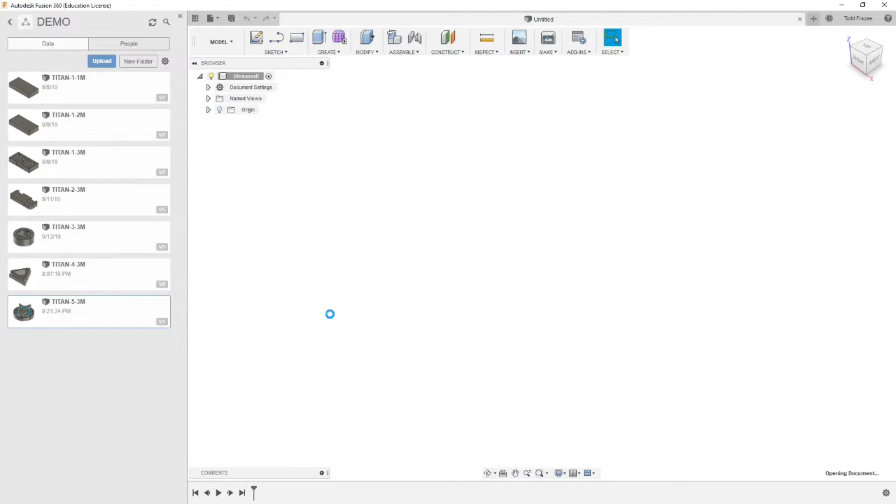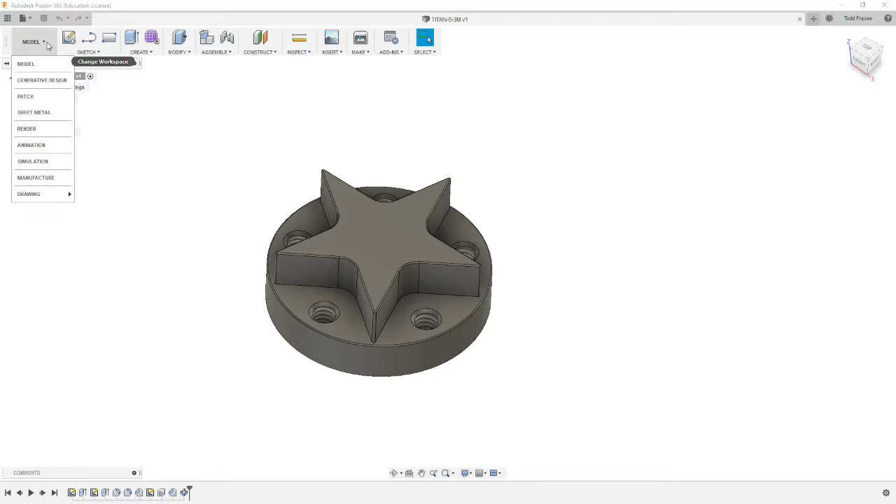So let's double click on that model to open it, and we're going to close the data panel so we get more space. And it's this star shape with a series of holes around it. Okay, so we're first going to switch to manufacture mode. And as usual, we're going to create a new setup.

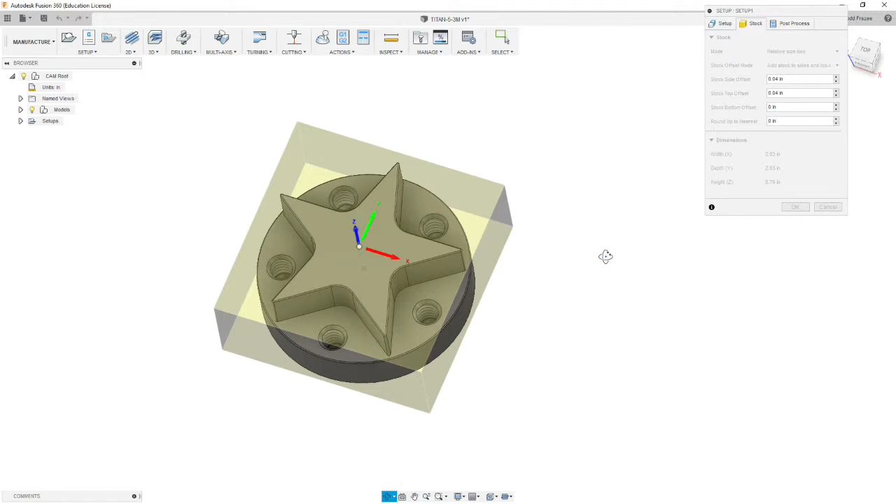We're going to have this setups highlighted. We're going to go setup, new setup, and we're going to set up our stock. Now this is probably the first project you've done where you set up stock on a circular part. So in this part, our overall diameter is 1.95. So we have 50 thousandths of extra material total.

So we're going to put 0.025 as our side offset, and we should have an X width of 2 inches by 2 inches, and we have 0.04 that we're going to move off the top, and we have an overall thickness that we're starting with of 1 inch. So we need to put that difference on the stock bottom offset. So that's going to be 0.21. So it should give us a 2 inch by 2 inch by 1 inch piece of material.

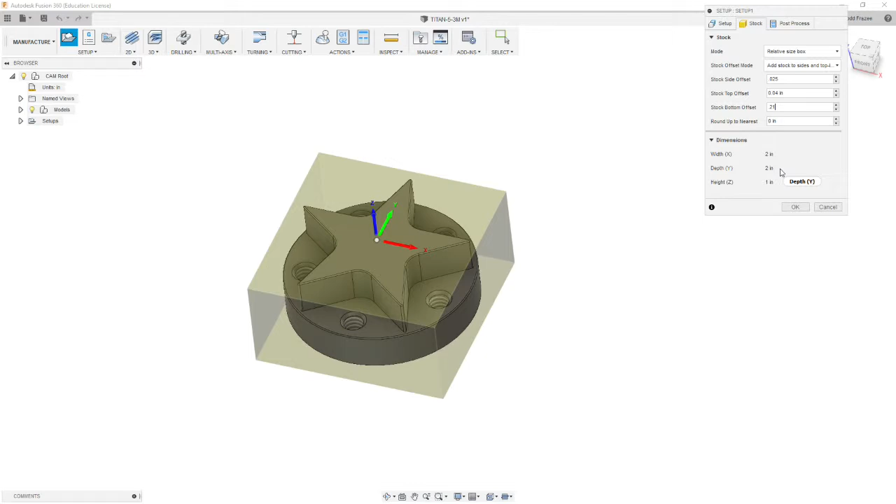Now the direction that is saw cut, you're going to want to have facing so that it's not the faces you clamp against. 2 of the faces will be mill cold rolled from the aluminum mill, and then the other 2 faces that have the saw cuts might vary in length, so it might be a little more than 2 inches.

Okay, so now we're going to go to setup. At this point, if your x-axis and y is as shown here, we're just going to go and pick a stock box point of this corner for your first operation. Okay, and you may need to flip it, and if you have trouble with that, you cycle through these different options here. Okay, since we've done that several times, I'm just going to move on to the next tab, which is our post-process tab.

And we're going to call this 1041. Our program comment is going to be operation 1 with a work coordinate system of 1. Okay, we'll select OK, and our first setup is created there.

Okay, now we're going to do our first operation, and as usual, it's going to be a face mill. So we're going to come in here and face this thing, and we're going to select from our Titan building blocks library tool 1, which is our 3-inch face mill. We're going to go 4,000 RPM. And I'm going to start having you go a little bit faster. So we're going to go 40 inches a minute here, 40 inches a minute for all of these.

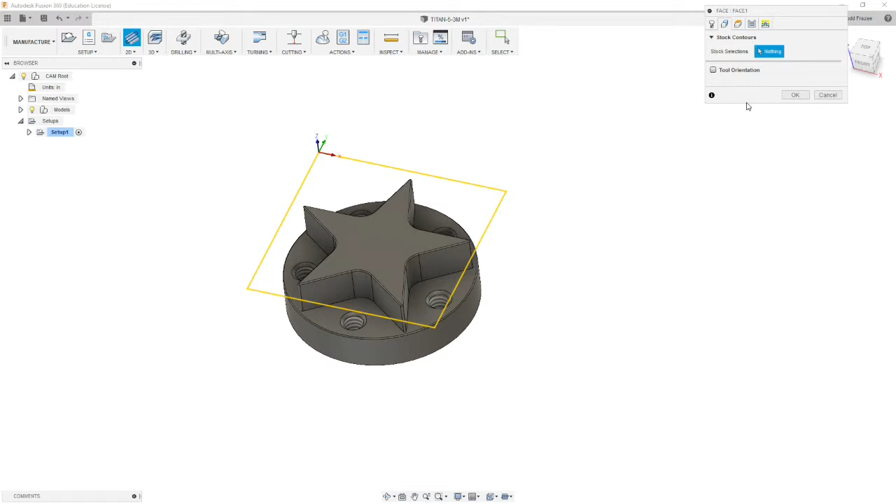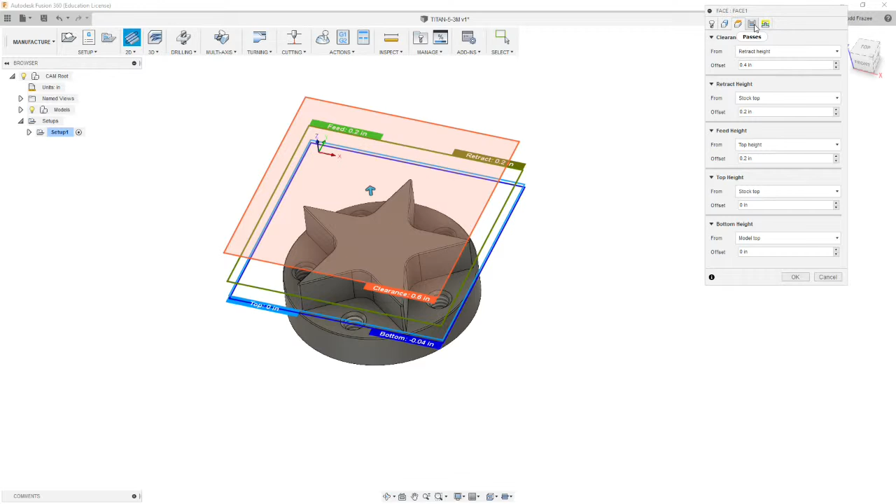Okay, we're going to go on to the next tab, which is geometry. There's really nothing to select here. We're going to go to our heights, default, default, default, default, default. So we should be cutting off 40 thousandths worth of the material, which is between the cyan plane and the dark blue plane. Okay, we're going to move on to passes. 4 thousandths tolerance is fine.

Pass direction. We're actually going to go 90 on this, and our pass extension is going to be 1.6. And we're going to leave the stock offset alone and step over alone. And what we want to do is, since this is doing one single cut, we want the direction of cut to go against the fixed jaw of the vise, especially with this small of a piece, if we go from side to side.

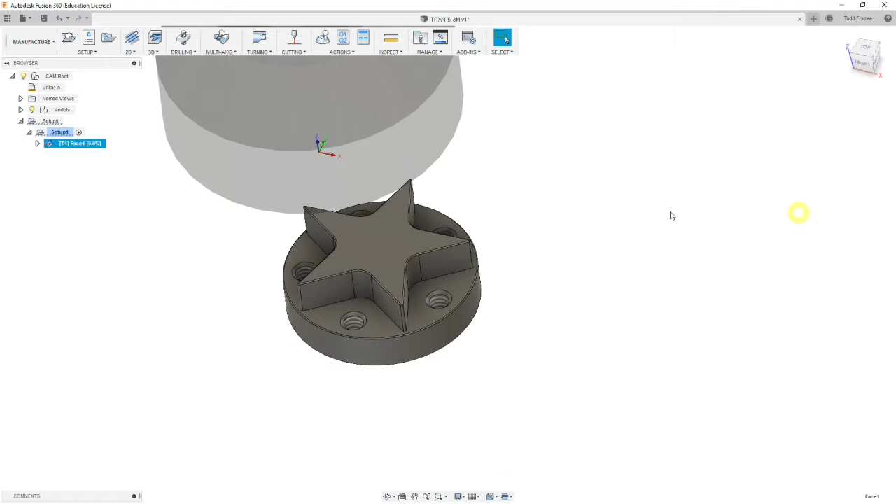So if we set this at 90, I believe it will go in the y-axis, and ideally we want it to move the table towards the operator, but the cut will go away from the operator, pushing it against the fixed jaw. I'm going to go ahead and hit OK and see if those parameters work. Okay, they did not. It's coming down and coming out.

So the way you change that, we're going to go to Edit, and we're back at our Passes tab. You switch this box that says from the other side, and what it'll do is it'll come from the opposite side of the part and reverse the cut.

Okay, so we don't want multiple depths. We don't want stock to leave. And then we're going to move on to the next tab, which is linking. We're going to leave all these first ones at default. Lead in, we're not going to have a vertical radius, so we're going to set that at 0. And we're going to leave these others at default.

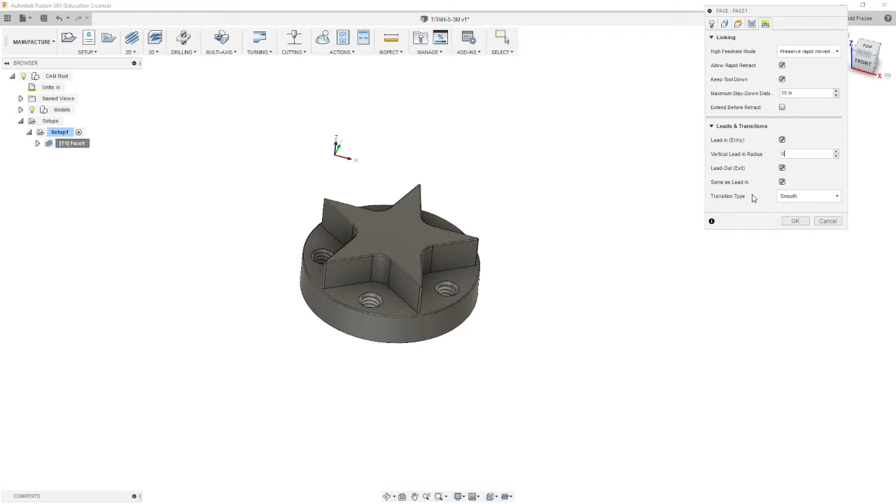And select OK. So now the face mill comes straight down, and then it feeds towards the fixed jaw of the vise, because we selected that box on the prior tabs. Okay, we're done with that. We're going to move on, and we're going to do a 2D adaptive clearing on this.

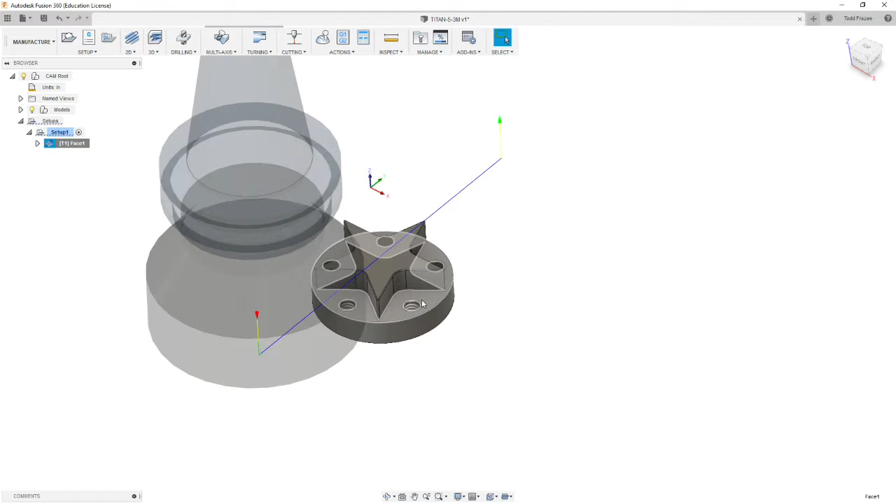Alright, so for our 2D adaptive clearing, we're going to use the 1/2 inch end mill. And it's probably not going to be able to cut these radiuses here. So we're going to be coming back in with a finish cutter, which is the 3/8, to clean all that up anyway. So we're going to go 2D, adaptive clearing. You're going to select the Titan library, 1/2 inch end mill.

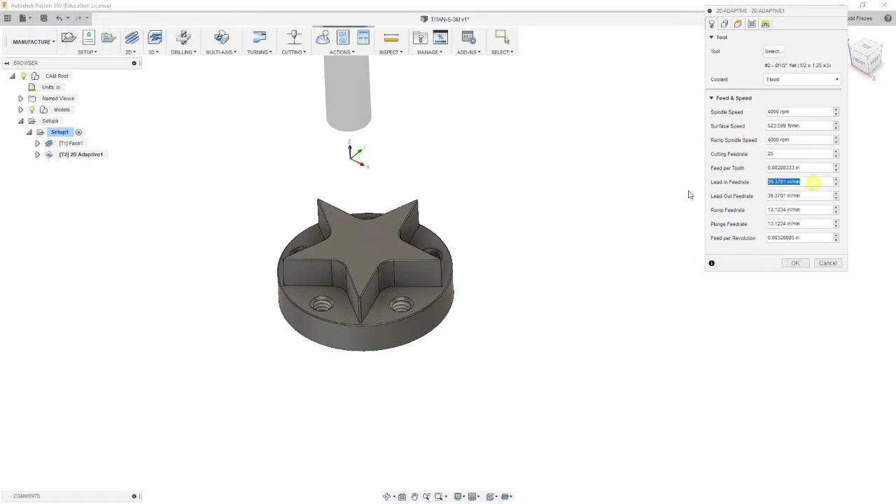Okay, with a 1/2 inch end mill, we're going to go 4,000 RPM. And we're going to go to cutting feed rate of 25 inches a minute, 25 inches a minute, 25 inches a minute, 13 and 13. Okay. And we're going to go to geometry. Our pocket selections are going to be here and here.

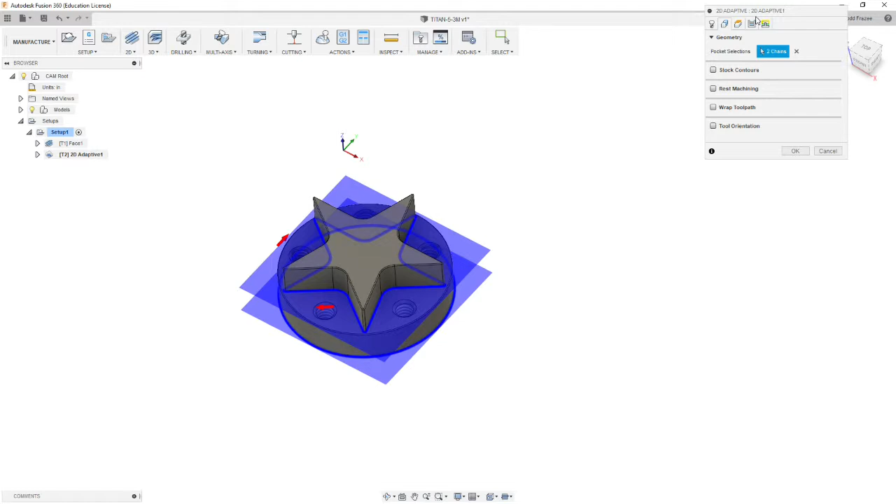And our stock contours, we're just going to leave that at default. It's what the box of the stock is, the 2 inch by 2 inch square. So we're going to move on to heights. We're going to leave all that at default. We're going to change this to model top because we've already cleared off the top of the part. And our top height is also going to be at model top.

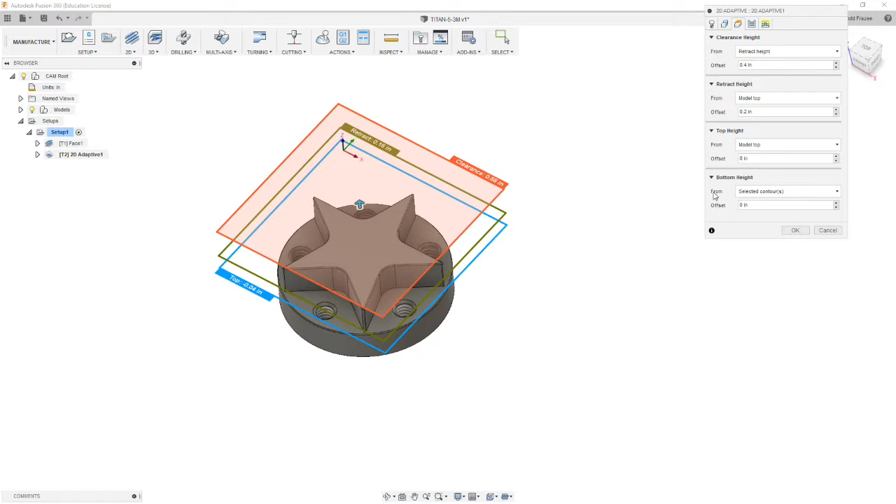Our bottom heights are going to be at selected contours, so it depends on which contour we selected. We're going to go to passes. Our tolerance at 4 thousandths is fine because this is a rough cut. Optimal load 0.2, we'll leave that alone. We want a minimum cutting radius of, that's fine, 0.05. It's going to cut as much as it can.

And we're going to climb cut, and we're going to do multiple depths. And our maximum step down is going to be 0.5. Okay. We're going to do order by depth. And we're going to leave 20 thousandths of stock to be removed by the next cutter. We're going to select smoothing and leave 4 tenths tolerance.

The next tab, we're going to leave all these at default, including the non-engagement feed rate. So when it doesn't pull up to the rapid plane, it'll go 25 inches a minute. We're going to do horizontal lead-in radius of 0.1. I don't think we need a vertical lead-in radius.

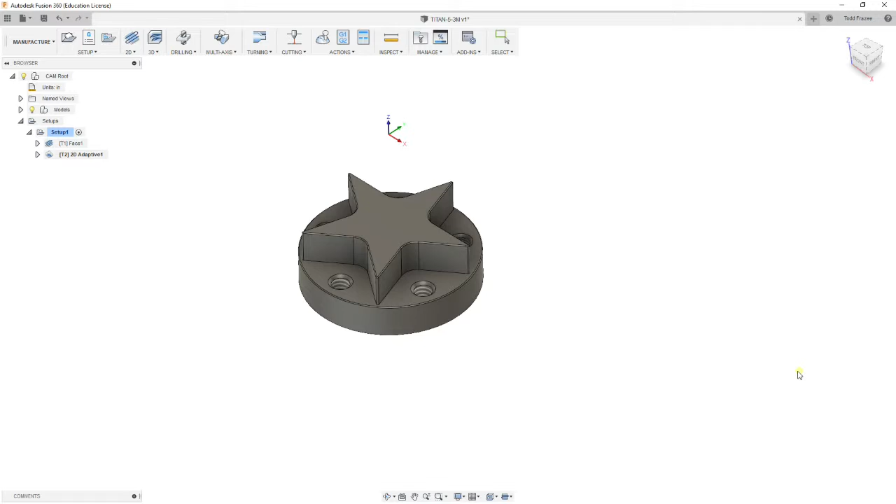Ramp type's going to be helix, 2 degrees. Ramp taper angle, leave it alone. Ramp clearance height, 0.1. Helical ramp diameter, let's set this at 0.3, a little bit smaller. And we don't worry about entry positions, at least at the moment. Let's hit OK and see what we get.

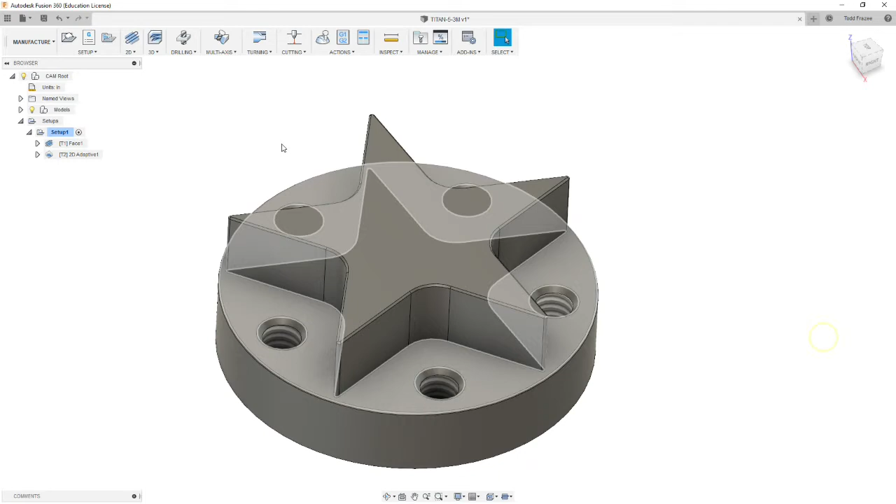So we get this kind of, looks kind of crazy, but yeah, it roughs here, and does 2 rough cuts for the cylinder. But it pretty much roughed the star out pretty well. We're going to go 2D. No, we're going to go 2D contour.

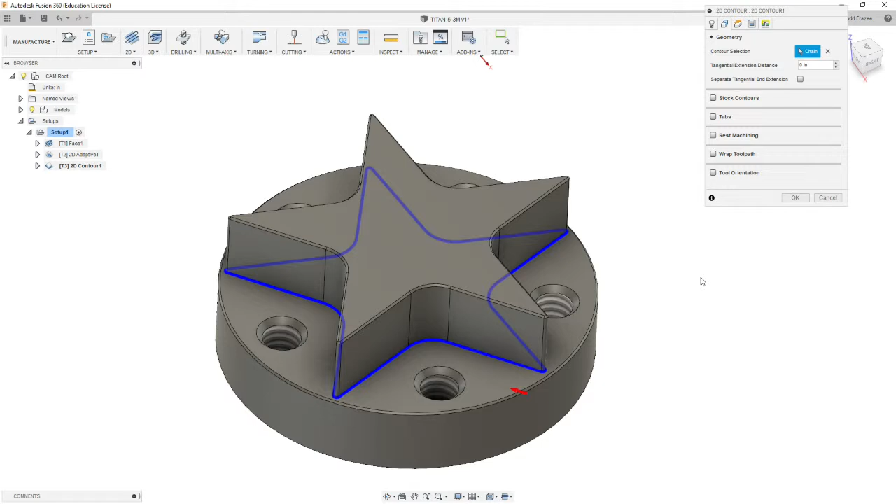We're going to select the 3/8 diameter tool. So that's tool number 3 in the Titan library. We're going to go 4,000 RPM. Again, 25 on all these feed rates, with half of that on the plunge. Okay, we're going to go to geometry, and we're going to select just the star. Make sure the arrow's on the outside.

We're going to go to heights, and we're going to go model top on retract height and model top on top height. Okay. And we're going to go to a depth of the contour we selected. Okay, so we have 4 tenths tolerance. It's fine. Left, we're climb cutting. We're going to switch from in computer to wear, and our compensation radius we're going to leave alone.

We're going to skip down here. Our finishing feed rate is going to stay at 25 inches a minute. We're going to come down here and select the rough passes. So our finishing step over box appears, and we're going to put 0.01 in that box. And so we're going to get 1 roughing pass on the sides. Our roughing pass maximum step over is going to be 0.2.

The reason for this being smaller is we don't have a lot of material to remove, but the distance between this arc and this circle is more than the diameter of our cutter. 4 thousandths smoothing deviation is fine for the roughing. We're going to do 2 step overs.

We're not going to do multiple step downs just because we've already cleared most of this material out of the way. We're going to go to smoothing and select that for our finish pass. Now we're going to move on to the linking tab.

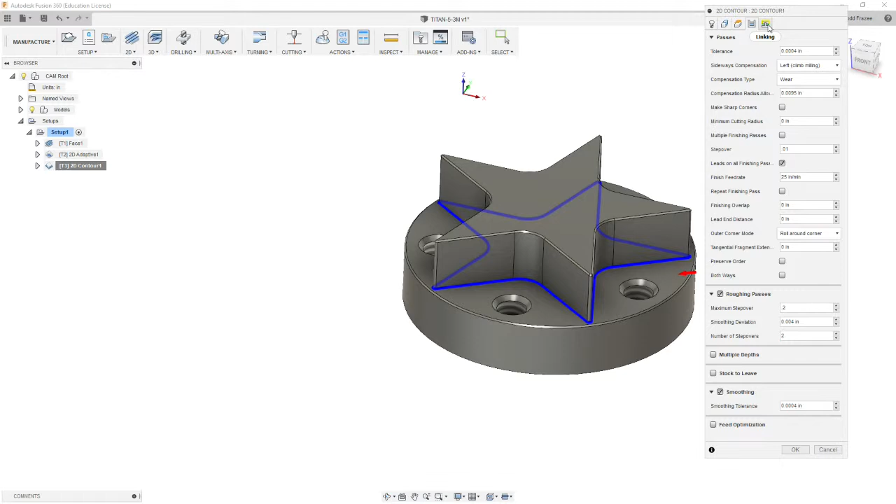Okay, so we have one rough cut, a second rough cut, and then a finish cut. It's going to finish the sides here. It's like a little clover leaf.

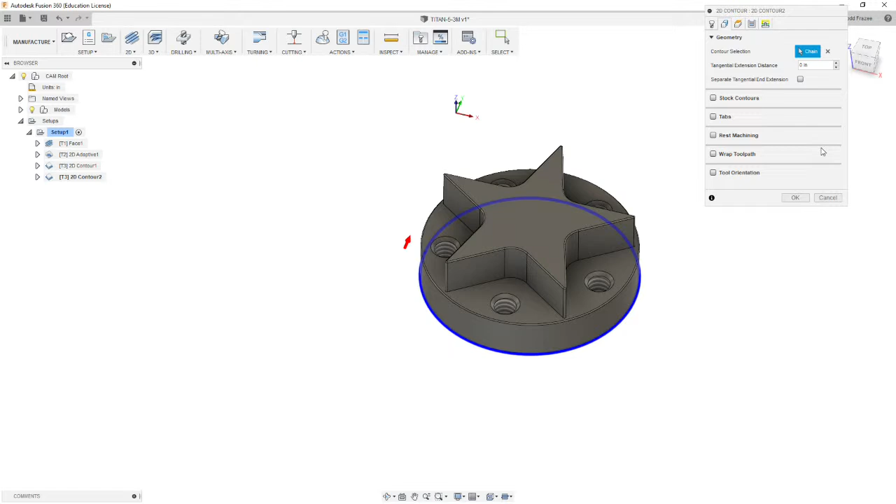Okay, now we're going to cut the bottom profile with the same end mill. So we're going to go to 2D. We're going to do 2D contour. We're going to select the bottom circle, and we've kept the same tool, so all the numbers will be the same on the tool tab. We've selected the circle on the bottom. We've checked that our arrow's on the correct side of the line. And then we're going to move on to heights. This is going to be model top.

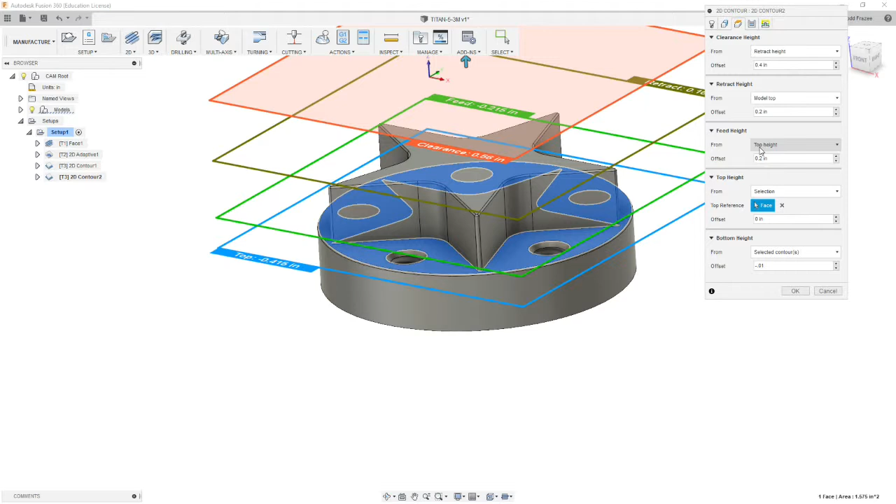Our top height, we're going to change that to selection. Our top height is actually going to be the top of that deck, because we've already machined all the way down. But that means our feed height needs to go higher. So our feed height is not going to be at the top height. Instead of top height, we're going to go to model top. And that way we make sure everything feeds down from model top to this plane.

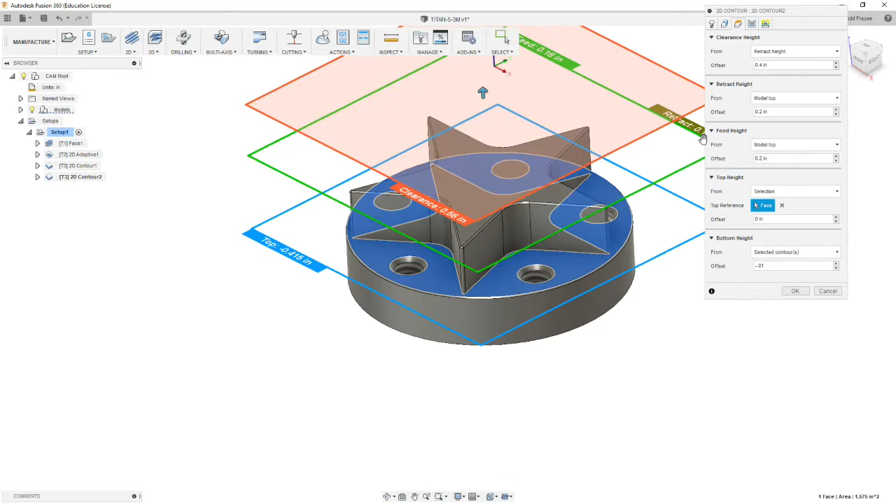Okay, we're going to move on to passes. We're going to leave it in computer. We're going to change that to wear. We're going to skip all these boxes until we get down to roughing passes. We're going to do a maximum step over of 0.3, and a smoothing deviation of 4 thousandths is fine with 1 step over. We're going to come back up to our finishing step over and put 0.01 there. That box appeared as soon as we checked the roughing passes. 25 inches a minute's fine.

Okay, we're going to do multiple depths. We're going to do a maximum depth of 0.25, and one finishing step down, and that finishing step down is going to be 0.01. It's a long wall. We're going to finish only at final depth, and we're going to use even step downs. I'm going to minimize roughing passes so we can see the rest of this. There aren't any islands, so we'll deselect that. And then we're going to hide multiple depths so that we can select smoothing, 4/10.

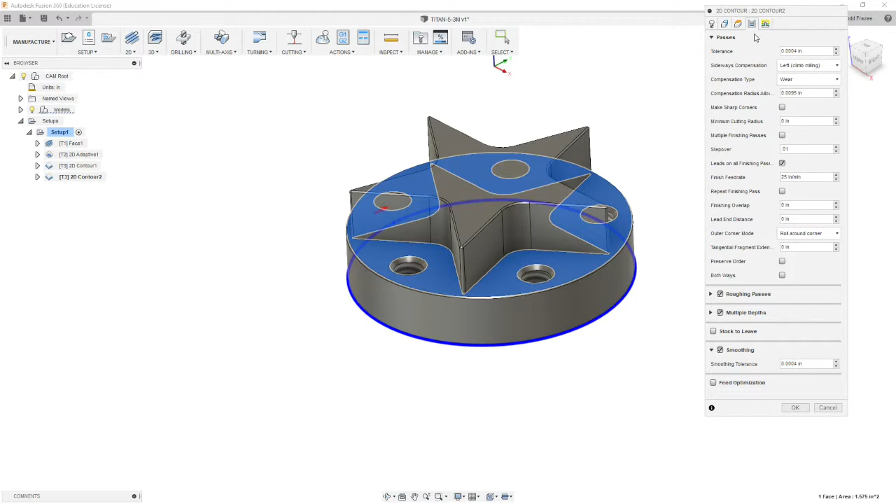Moving on to the linking tab. Lead-in's fine. Horizontal lead-in radius we're going to set at 0.1. 0.1 for our linear lead-in distance. 90 degrees is fine. We're not going to do a vertical lead-in on this, so we're going to set that at 0. Lead-in and lead-out's the same. We're not going to ramp in. We are going to put an entry position in line with this hole here. So this will be our entry position. We're going to hit OK.

Alright, so we come in, we arc in, we go around two rough cuts at two different heights and then a finish cut. Alright, moving on. We're going to do all our chamfering and then we'll spot drill. So we'll go to 2D chamfer, and we're going to do the star separately from this circle.

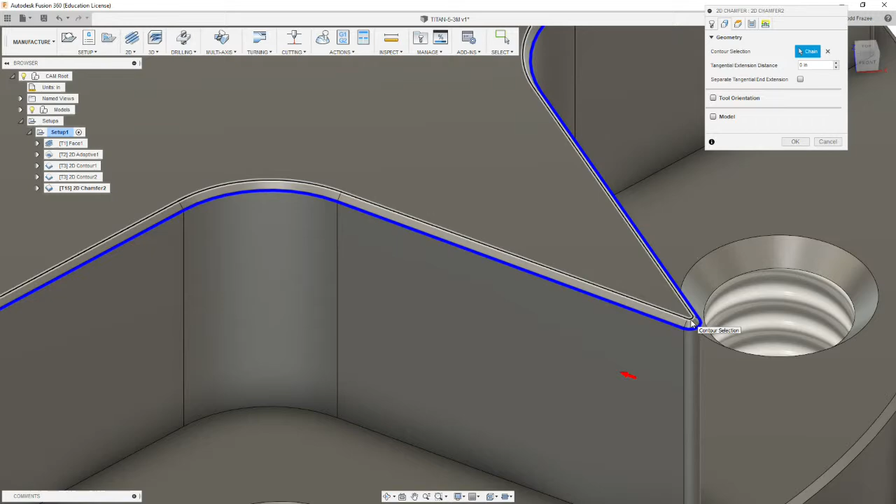So we've got to select our tool, which is going to be our 1/4 inch chamfer mill, tool number 15. Okay, 4,000 RPM, 20 inches a minute, 10 and 10 for ramp and plunge rate. Pretty much half. We go to geometry. We're going to select the bottom profile here. The reason we're doing that is we want this round to come out correctly. If we pick the top one, it may not, especially if the top ends up being sharp. Our arrow's on the correct side of the star.

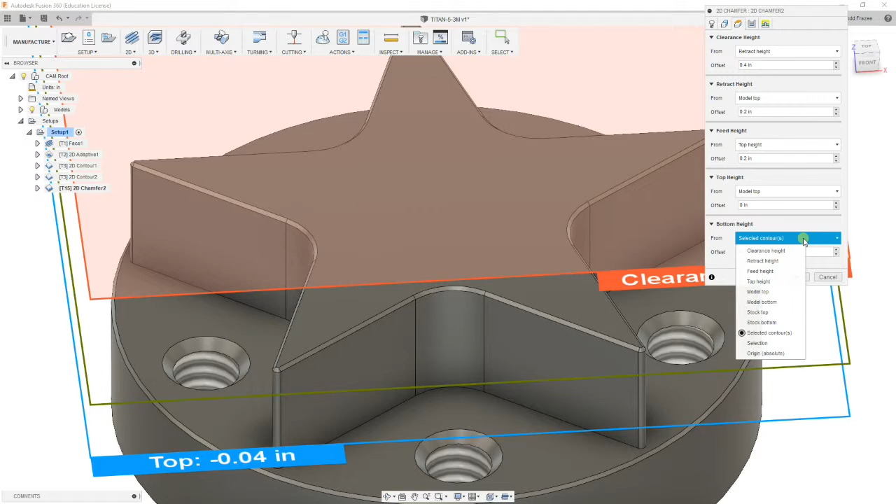We're going to go to our heights. It's going to be model top for retract height. Our top height is going to be model top. And our bottom height is actually going to be selected contour. And then we're going to go to our passes tab. Our compensation is going to switch to wear. We're going to leave these others at default. Our chamfer width is 0.01, it's a 10 thousandths chamfer. And our chamfer offset we're going to leave at default, which is 0.04. We're not going to put a chamfer clearance, put 0. We're going to select smoothing, 4/10 tolerance.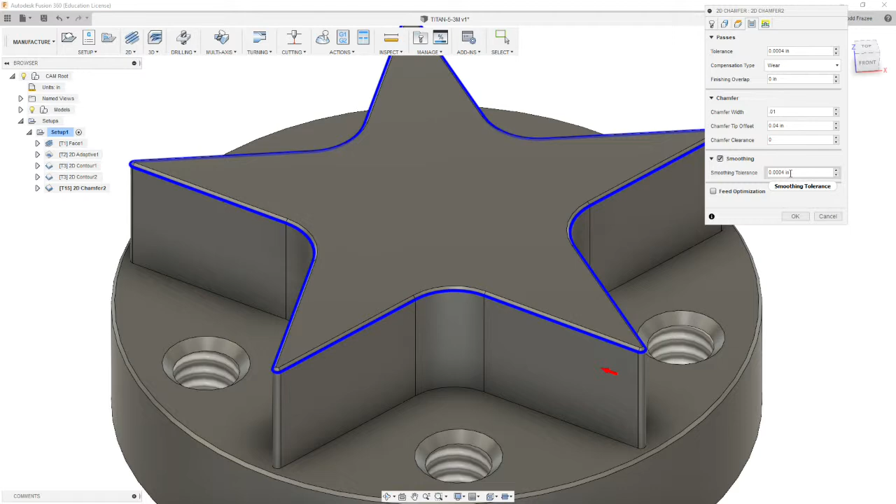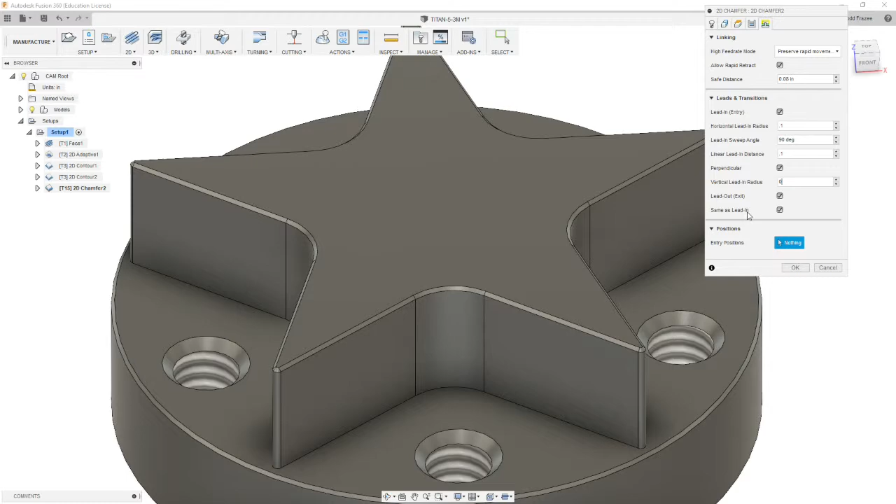Now we go to the linking tab, leave this all at default. We're going to have a horizontal lead-in radius of 0.1. 90 degrees is fine. Our linear lead-in distance is going to be the same, 0.1. It's going to come in perpendicular, and we're not going to put in a vertical lead-in. Lead-in and lead-out are going to be the same. We're going to select OK. And we have our first chamfer mill.

So to do the chamfer on the circle, we have to be careful because with the chamfer mill, we don't want the shank to run into these edges of the stars. We're going to right click on here and duplicate the chamfer mill that we used for the top. We're going to need to change quite a few parameters.

First thing we want to do is we need to find out how much room we have here for our chamfer mill to overhang without rubbing against the star. So we're going to go up to inspect and we're going to measure the distance between that radius and this edge here. And the distance is 0.024, so we have 24 thousandths, which isn't a whole lot.

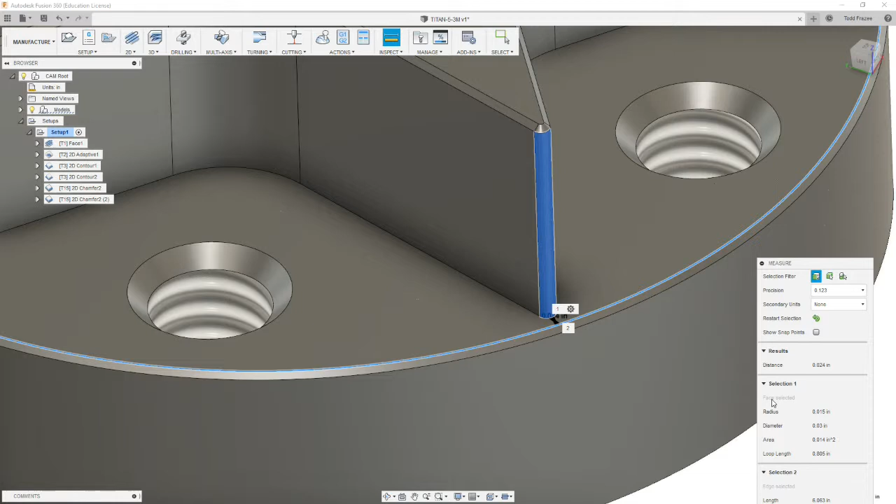So we need to make sure the chamfer mill is cutting on its outside edge, leaving enough distance to just barely clear this chamfer and not rub this feature. So we're going to close that, and we're going to edit this toolpath. So our RPMs and stuff are fine. That's the same as the last routine we did. We're going to go to geometry and we're going to clear the geometry selection because we're going to select something new. We're going to select this circle.

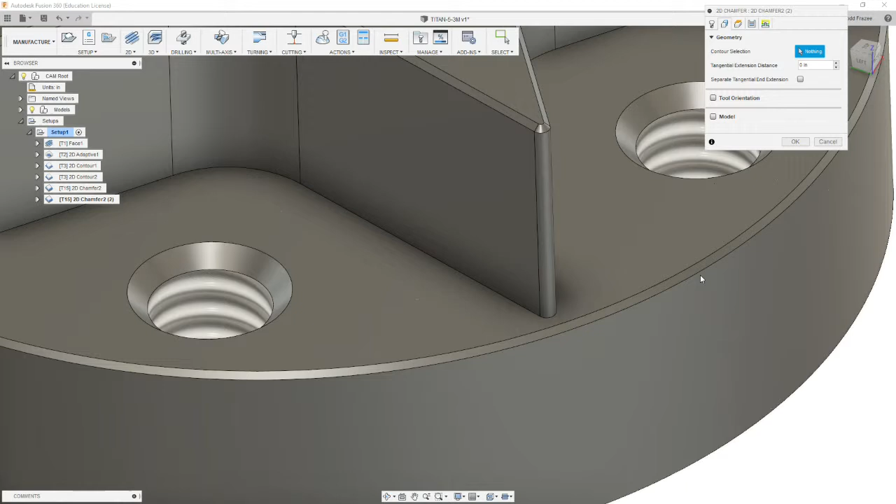And then we're going to move on to the heights tab. This is going to get a little tricky. So we're cutting down here, but we want to make sure that we're clear of our part when we're moving around. So our retract height is going to be based off model top. Our feed height is also going to be model top.

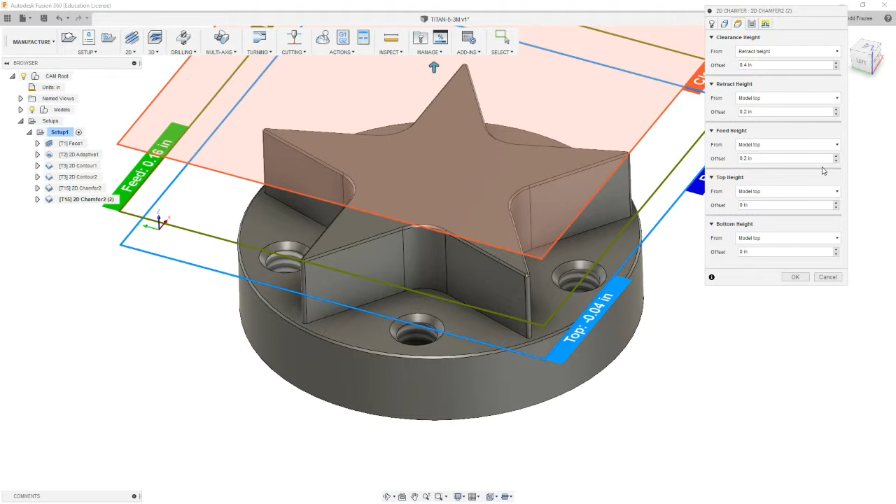Okay. Our top height of our cut is actually at this plane here. So we're going to do selection and we're going to select this plane here. Okay, so that's the top of our cut. The bottom height of our cut is going to be also that plane. So we're going to select that same plane and our arrows go away. What's going to happen is our chamfer is going to be made not based off these heights, but based off the overrides on the next tab.

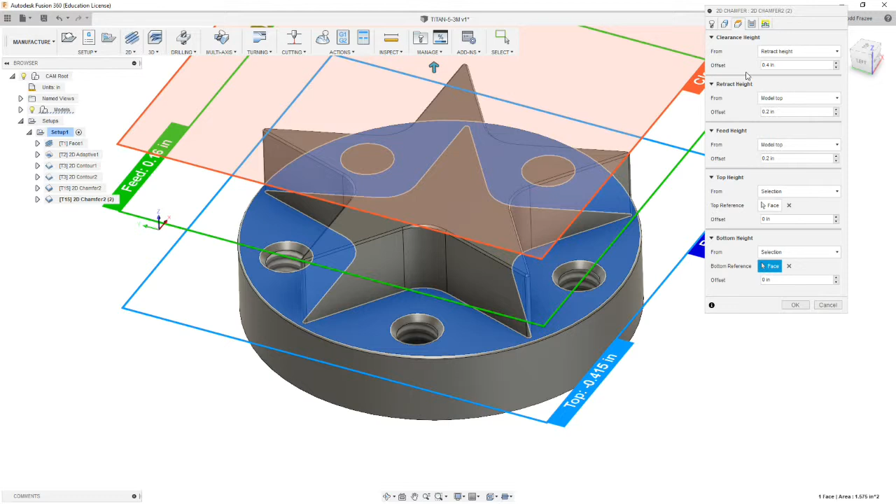So we're going to go to passes, and we have a 4/10 tolerance. Now, I discovered the first time I programmed this that even if the math factors out, the collision detection in Fusion, if you're using compensation, requires a lead-in. If you require the lead-in, its collision thinks it's going to hit these, even though the numbers we put in are mathematically correct. So we have to disable wear and just put it in computer. So we're not going to be able to compensate with the G41 line, but we can still adjust this cutter in Z to change the chamfer width.

Our chamfer width is 10 thousandths, and our chamfer offset needs to add up to 0.125, which is half the diameter of the cutter, minus this amount, plus an amount that will not hit this. So how we're going to calculate that is we're going to get our handy dandy calculator out, drag that onto the screen here. So if we are using a 1/4 inch chamfer mill, the diameter is 0.25. We're going to divide that by half, which gives us 0.125. We're going to subtract our chamfer width, 0.01. Okay, so that's the amount that would hang off the part if we just cut it with the very tip of the cutter.

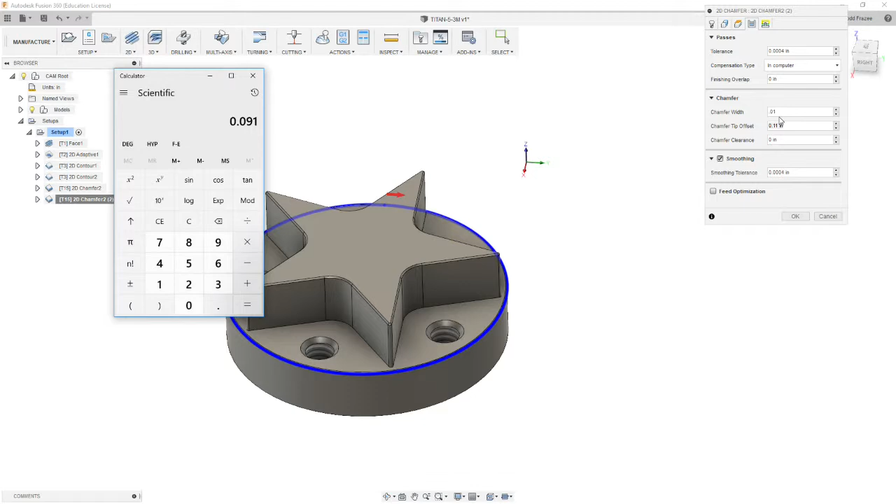These two values have to add up to less than the radius of the cutter. So as long as that's 0.125 or smaller total, we're good. So we're at 0.12, which leaves 5/1000ths of diameter overhang of our chamfer mill. We'll have smoothing selected, and then we go to the linking tab and we leave these at default, and our leads and transitions, we have those deselected.

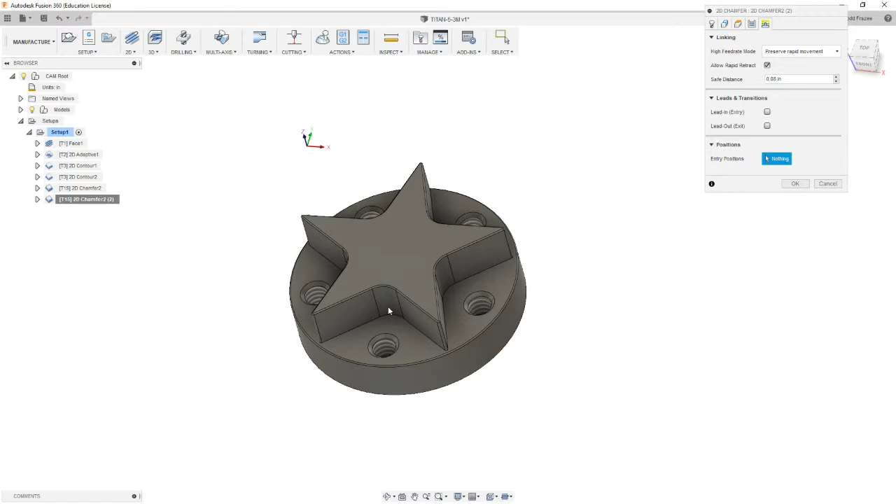Okay, and we're going to go choose an entry point of a spot in the front. So we got x-axis going this way. We're going to put it somewhat in line with this hole so the operator can see what's going on when this comes in. Okay, we're going to hit OK. And there we go.

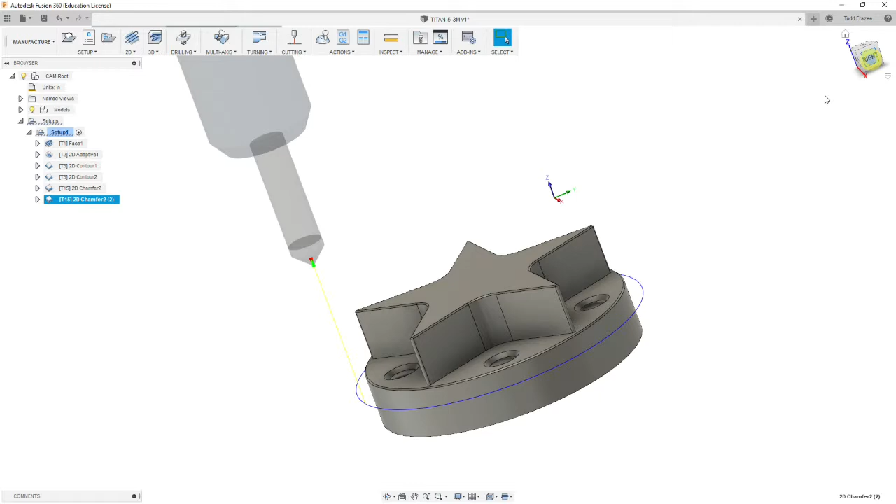Actually, let's look at this in the right view, so we can see the chamfer mill coming around when we simulate. So we're going to simulate just that one toolpath with, in this case, the stock turned off so we can see what's going on. So we got our chamfer mill coming around. Okay, so as it comes around, I'm going to pause the simulation.

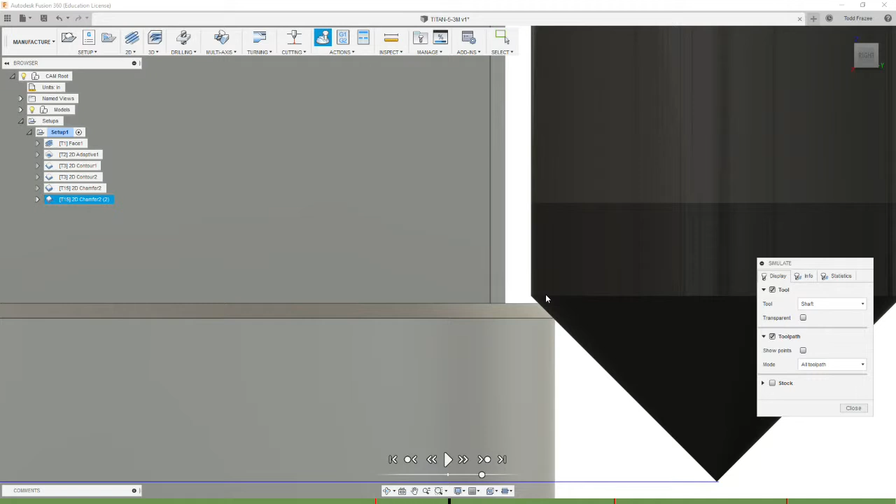And as you can see, we have clearance all the way around. So that's only about 5/1000ths. It's going to cut on the very top of the chamfer mill. So again, we've offset that by almost the entire diameter of the cutter, less about 5/1000ths.

Now we're going to move on to spot drilling these holes. And we need to measure the diameter of this chamfer. This chamfer diameter is 0.265. So we need to go to a depth that is half of that diameter to achieve that chamfer or countersink.

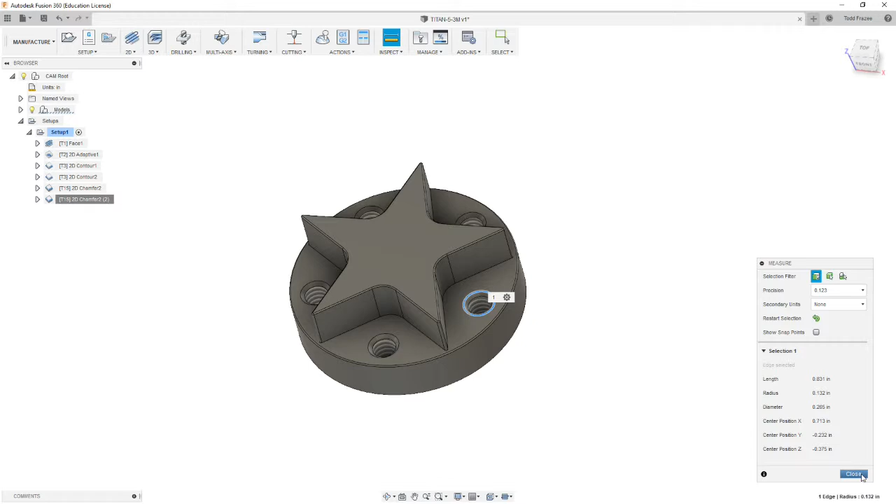So we're going to go to drilling. And we measured this at larger than 1/4 of an inch, so we have to go in with a larger chamfer mill. So we're going to go to select, and we're going to use the 3/8 chamfer mill. Okay, and it's 4,000 RPM, and we're still going to go 10, even though it's bigger in diameter.

And our geometry is going to be one of those faces of the countersink. And we're going to select all the same diameters. We're going to move on to heights. Our retract height is going to be based off model top. Our feed height is also going to be based off model top. And then our top height of our operation is going to be hole top, which is fine.

But our hole bottom is going to be based off hole top and a punched in value. So we're going to put in a negative offset of half of 0.265, which is 0.1325. And that has to be a negative number. Okay, so we get our chamfers, or our countersink, going in.

We're going to move on to cycles, and we're going to counterbore so that we can put in a 1 second dwell at the bottom. Okay, we're going to hit OK. And we got our routine. Now we're going to go on to drilling. Now the holes in this part are 1/4 holes. So we're going to go to drilling. We're going to do our pilot or tap drill size.

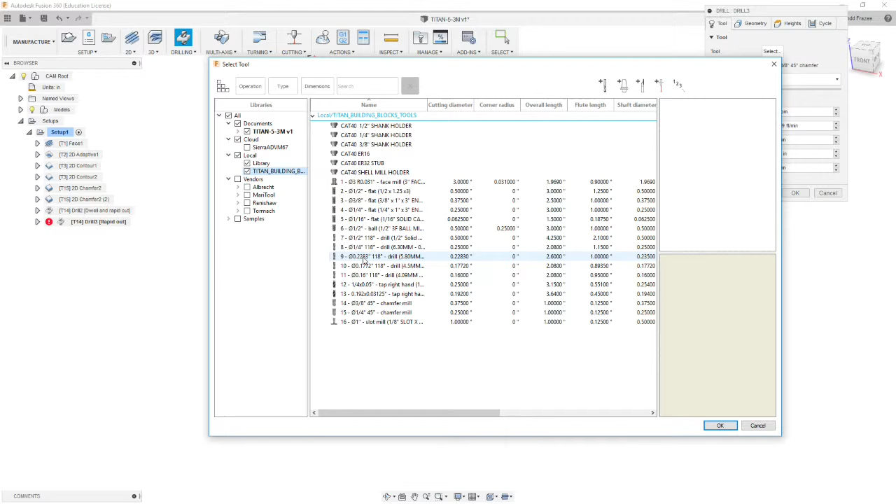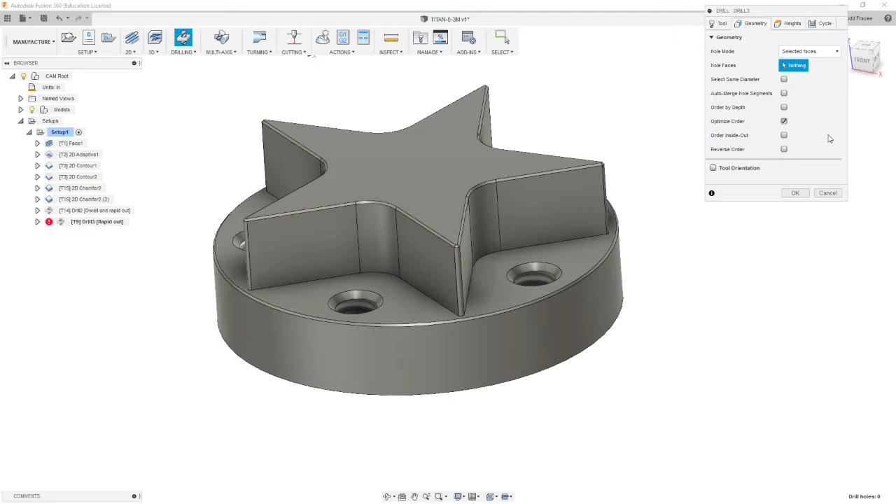We're going to go to Titan building blocks, and we're going to go to our 0.2283 drill. It's tool number 9. And we're going to go 4,000 RPMs, fine, 16 inches a minute's fine, and 16 inches a minute for retract. We're going to select our holes, go to geometry, and select one of the cylinders for our holes. And then we're going to select all the ones that are the same diameter.

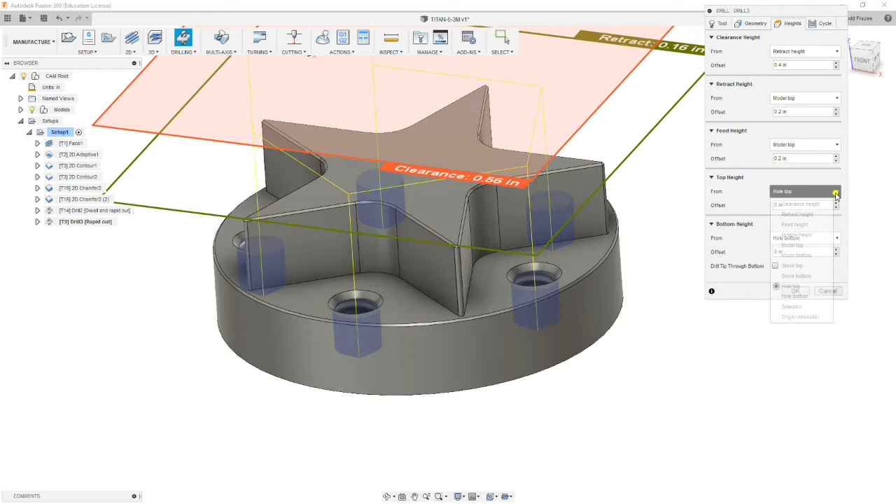And then we're going to go to heights. We're going to have model top for retract height and feed height. Our top height is going to be selection, because we're going to select this plane for the top of the hole. That accounts for the chamfer. Our bottom height is going to be the hole bottom, but we're going to have the drill bit go deeper, so it makes the hole at the full depth that the model is designed.

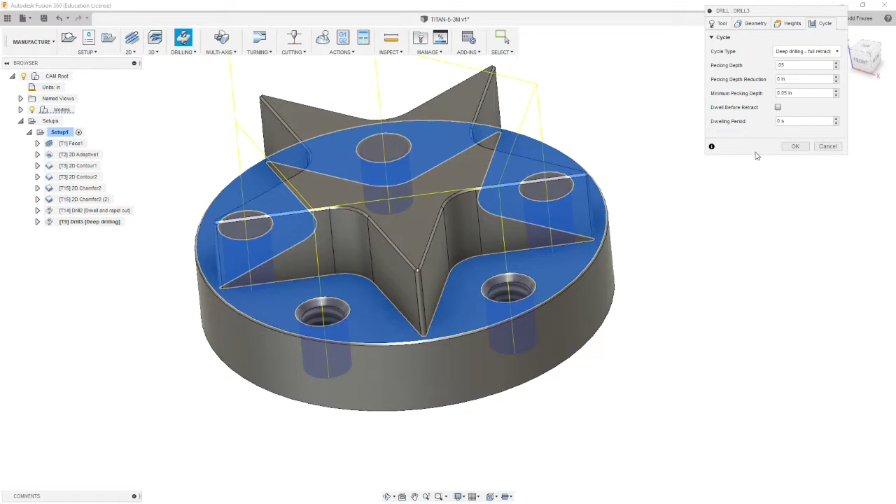We're going to go to cycle, and we're going to do a deep drilling cycle, or peck drill. Our peck depth, we're going to set that at 0.05, that's fine, and we're not going to deal with any of the other parameters. We're going to select OK, and we're done with our deep drilling. Okay, so we've done our drilling, and something I noticed about the design of this part, we're going to look at how deep our drill went.

So our drill bit has gone almost all the way through the part, and the way they've designed this, the threaded hole is shallow enough that we aren't going to get the full 275 thousandths of thread. There's just not enough clearance in a hole that is 300 thousandths deep to get a 1/4-20 thread all the way through there, unless we were to go all the way through the part. So we'll go ahead and program the tap, but we're going to leave the material between the two holes, and we're just going to live with the number of threads we have.

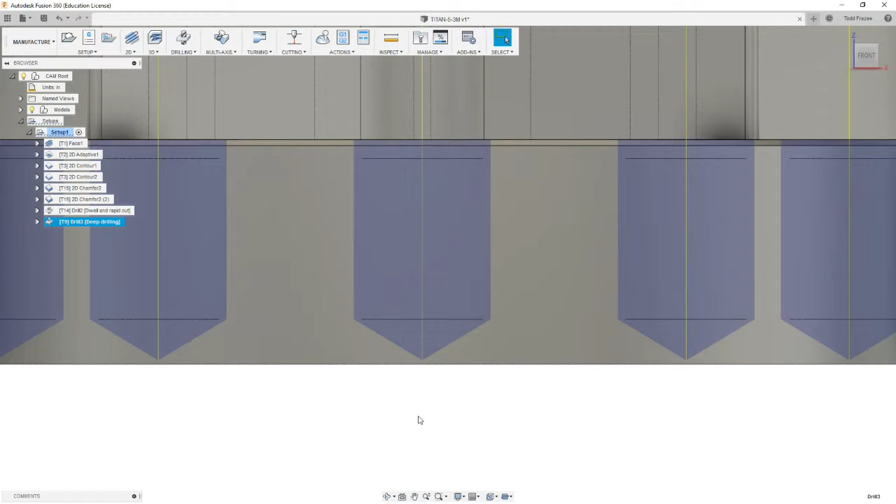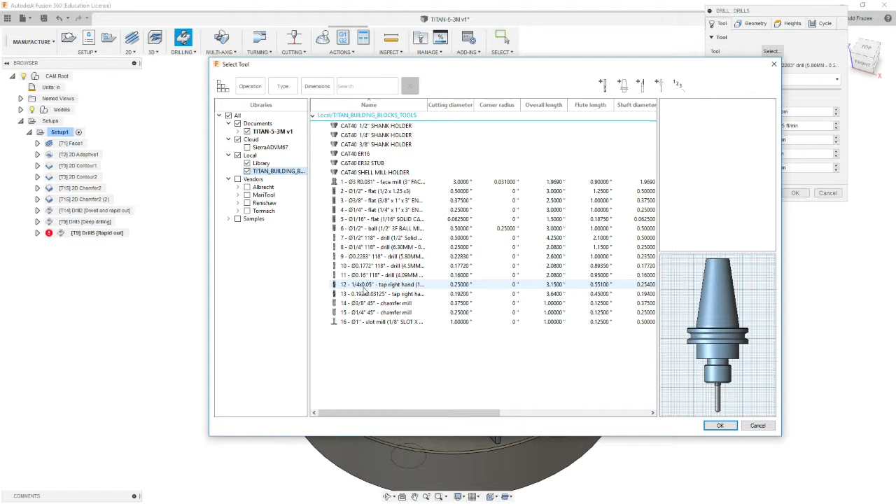Especially with a roll tap, they don't do well going all the way through material. They tend to work better in a blind hole. So we're going to go to drilling, and we're going to select our 1/4-20 tap from the Titan library, which it says here, tool number 12. Because it's a roll tap, we're going to leave that at 500 RPM. And on geometry, we're going to select one of our holes, and select all the same diameter so it gets the rest of them.

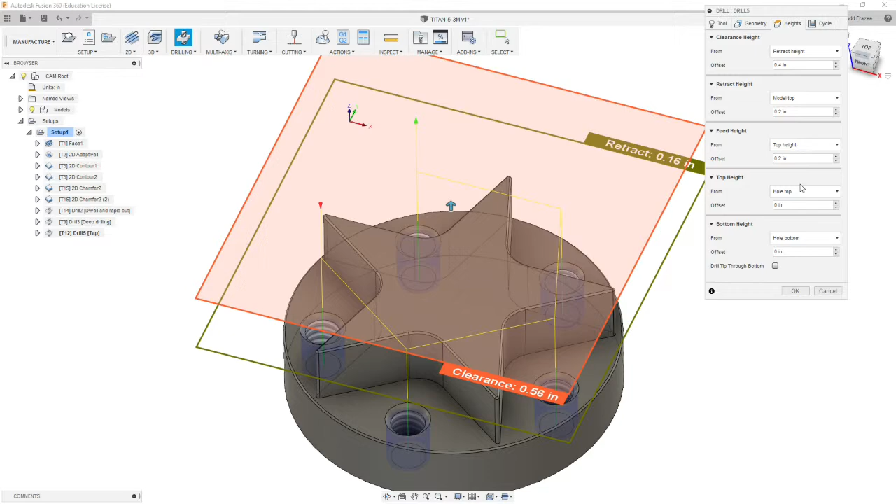And then we'll move on to heights, and our retract height is going to be at model top. Top height is selection. We're going to select that plane. The feed height needs to be at model top, and that way, with these two planes, all our rapid moves will be above the part. And then we're going to go from that same selected plane down negative 0.275. Alright, so after doing that, we're going to go to cycle, make sure we're on right hand tapping, select OK, and we should have our threads.

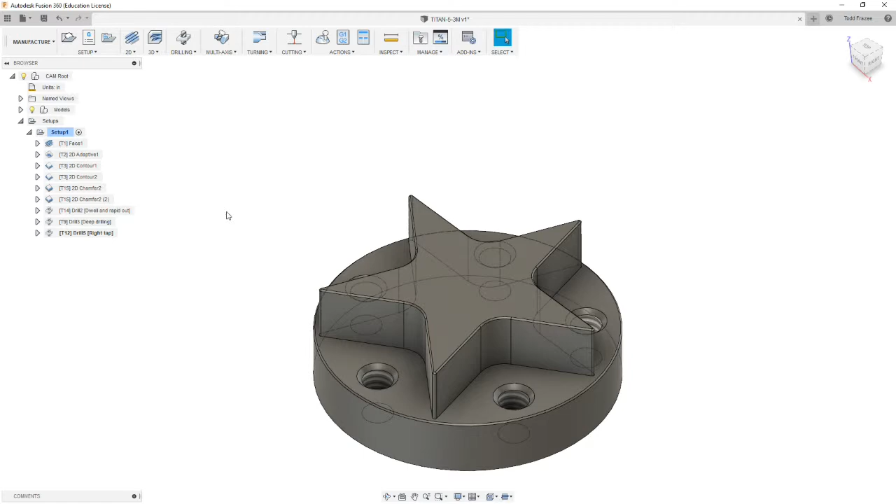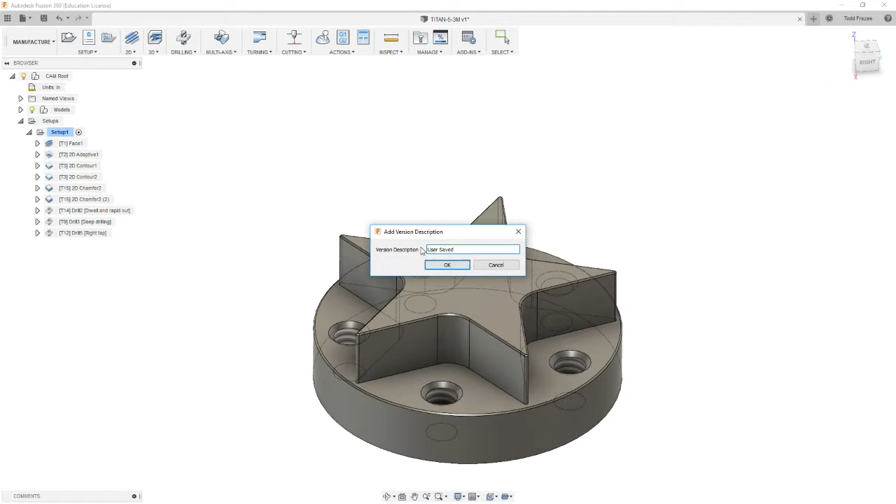Alright, so that is it for the majority of the part, and now is the time to do some engraving. So I'm going to show you how to flip between model and manufacture mode and update your model. So we want to save all this, make sure that we don't lose any of this. And you're going to go to model mode, and we're going to create a new sketch, and we're going to put it on this face.

And you can do what you like here. I'm going to sketch my initials, so I'm just going to use text, but you could just draw lines or a logo if you like. But to get full credit, you have to engrave something on there. So I'm going to use text. I'm going to place my text here. And I'm going to use a capital T and capital F.

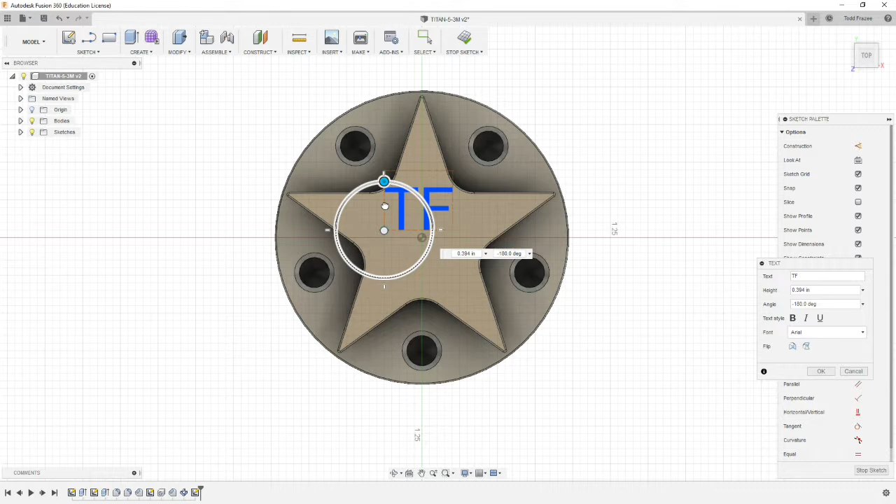Now you notice it's upside down. That's alright. I'm going to just rotate it like this. And then I'm going to grab it and I'm going to center it. Okay. Now I'm not going to use that font though. I'm going to go to our fonts. So I'm going to select this font called CDM-SHX, which is a single line font. For such a small feature, it'll be easier to engrave. So I'm going to move that over a little bit to the left. And I'm going to select OK.

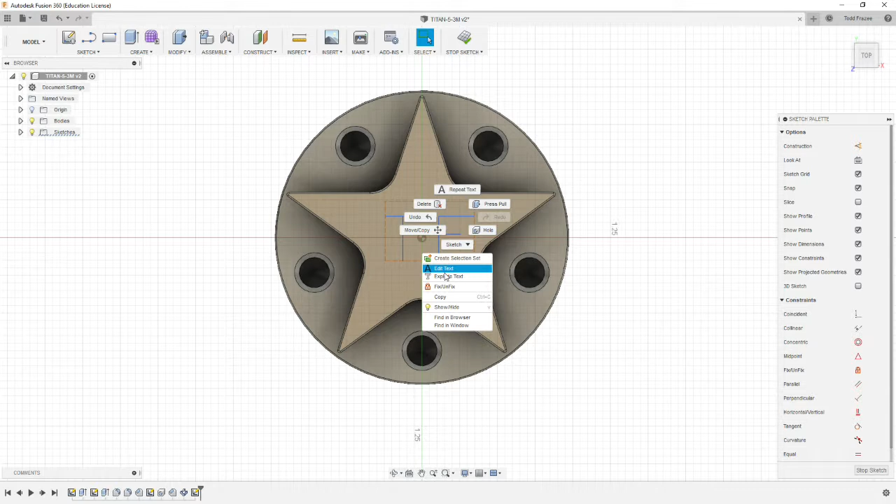And then we're going to select on that text and right click on it. So right now it's text. You can change it if you double click on it, but we can't machine that. What we can machine is exploded text, which becomes geometry. So we're going to explode this text, and now it's literally just lines. You won't be able to go in and type in a change. You could draw it on there. So I'm going to say stop sketch, and then I'm going to save.

And then we're going to go back to manufacture mode. And you're going to get all these warnings, which is fine. What it's telling you is, hey, this model's changed. So you're going to highlight the setup, and you're going to right click, and you're going to select generate. Provided nothing was deleted in the model, all your toolpaths you already did will be regenerated when you do that. Good time to save.

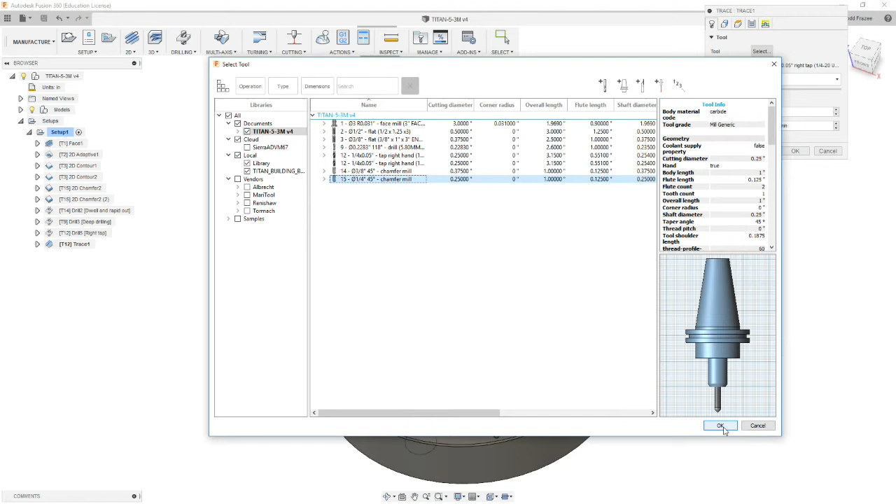And now we're going to do a 2D trace command. Okay, and I'm going to select the 1/4 inch chamfer mill that we've been using for that. And we're going to go 4,000 RPM, and the 20 and 20 is pretty good for engraving. Okay, our curve selections are going to be this one, this one, this one, this one, and this one.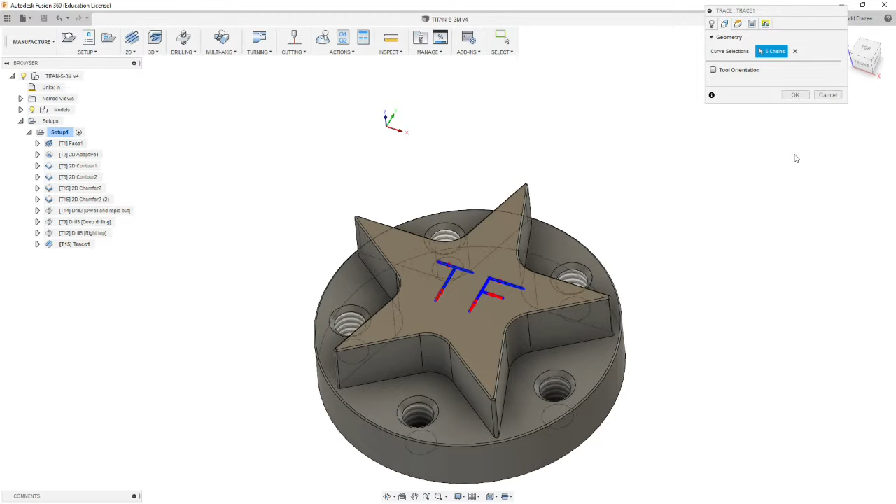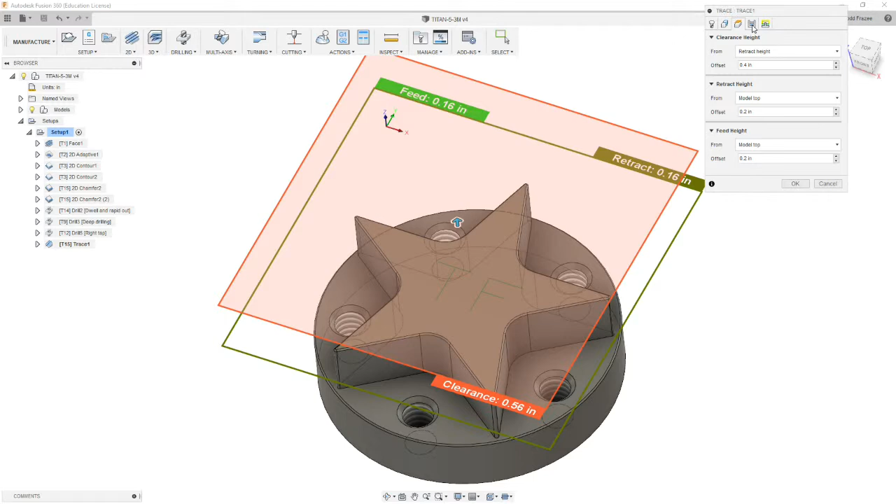Okay. Then we're going to go to our settings here. Our retract height is going to be at model top. Our feed height is going to be at model top. And then we're going to move on to our passes. So in our passes tab, we're going to have 4/10 tolerance. Pass extension we're going to leave alone. We're going to have a sideways compensation of center, so none of that. Repeat passes, preserve order, both ways, we can leave those deselected. Maximum angle of 90 degrees is fine.

We're doing an axial offset of -0.007. So our sketch sits right on top of this surface, and we're going to engrave 7/1000 into the material. We don't need axial offset passes. We don't need multiples. And the up-down milling, I don't care. And then we're going to deselect chamfer if it's selected, and deselect stock to leave.

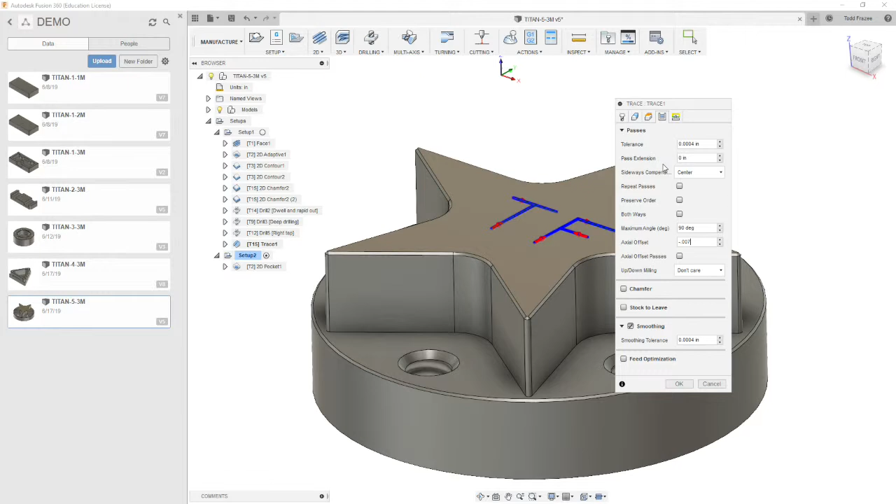We do want the smoothing on. We want nice clean moves. If you have a curve on yours and it's small lettering, it's going to affect it. In the case of mine, they're all line segments, so it may not make any difference. But if you had like a letter C, letter O, 0, circular thing, that'll make sure there aren't facets in it. Okay, and then we're going to move on to the linking tab. And we don't want lead-ins and lead-outs. We want the plunge straight down. We're going to select OK.

So there's our engraving that should have machined 7/1000 into the workpiece. Now, because it's into the model, you can't tell with the model displayed in shaded mode. So what we're going to do is switch the visual style temporarily to just a wireframe. That's going to allow us to see inside the model. And you can see our green geometry with our blue toolpath cutting into the model, and they're plunges straight down. So that should work pretty well.

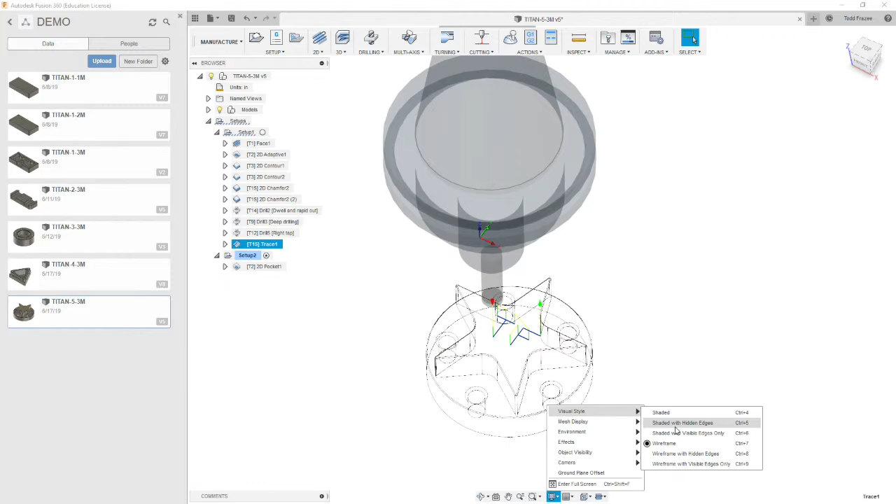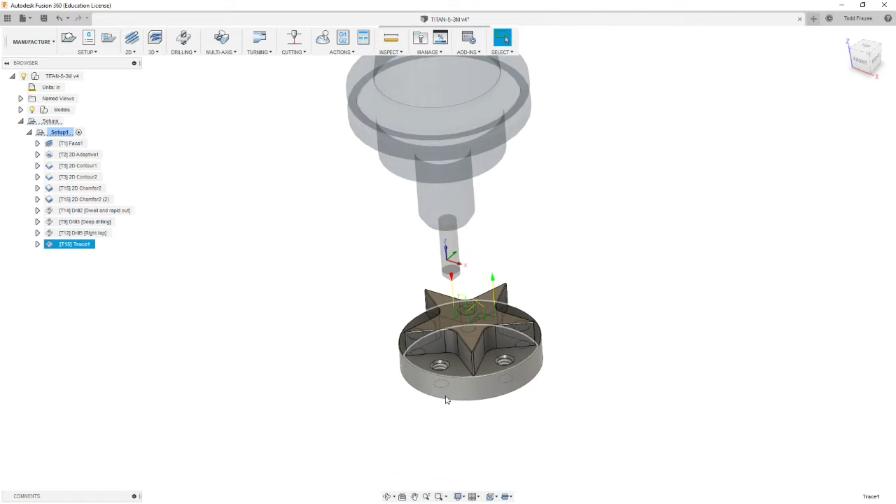And we'll return to shaded mode here by picking down here at the bottom, going to visual style, and we typically want shaded with visible edges only. I'll have to adjust it down on the machine a little bit when it gets to this engraving, and it's at the very end of our program, so that should be fine. For that reason, we're not going to reorder the chamfer mill to be in line with these other ones. We're going to make sure to get the majority of the part done, and then we can mess with the engraving at the end. Okay, so that concludes the programming of the first side of this part.

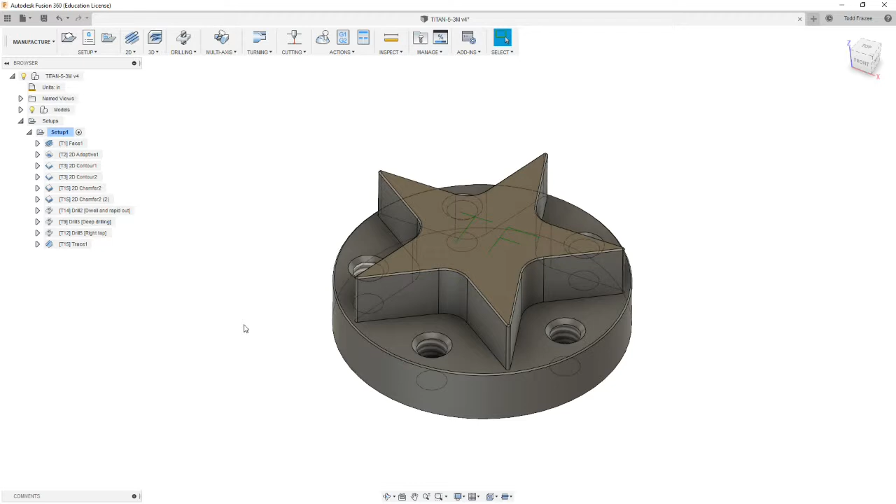And for the second side, we're going to hold this in a soft jaw, which holds onto the diameter of the part and holds it so we can mill off the back. So we're going to create a new setup. And we're going to flip the part in the orientation we're really going to be looking at it in. Okay. So let's set our stock.

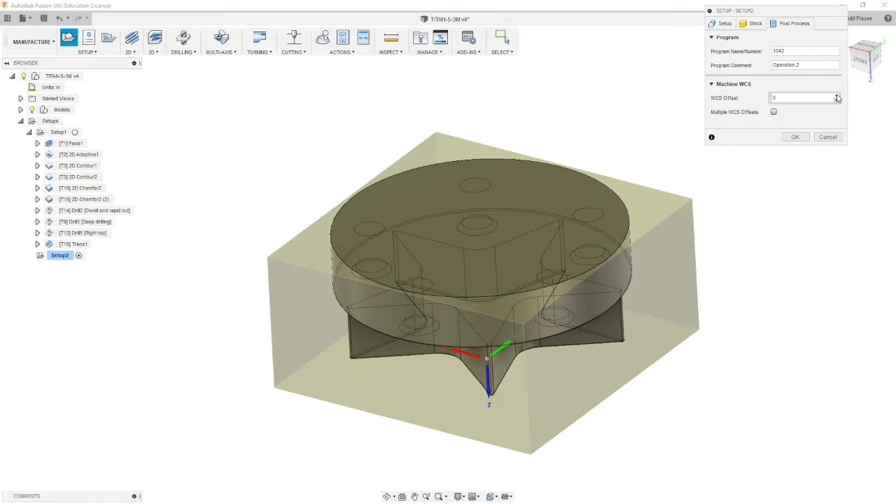Our stock is still going to have a side offset of 0.025. Our top stock offset is going to be 0.21. Okay, and then our bottom offset will be 0. So this should reflect the 4 thousandths we took off the top. In our post-process tab, we're going to call this 5042, or operation 2, with a work coordinate system of 1.

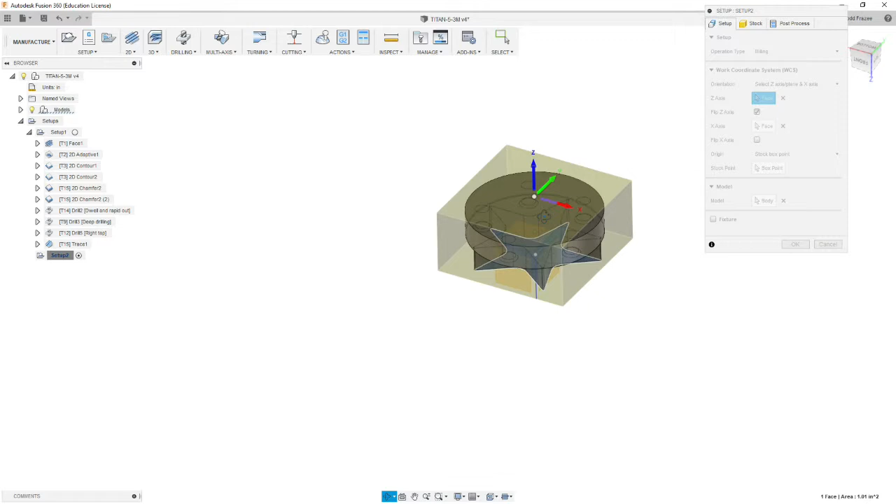And now we need to set our origin. So where we want our origin is on this part, we're going to set it up. We need to flip our orientation. So we're going to go z-axis plane and x-axis. So we actually are going to set our origin this time on the bottom of our part. So we got our z-axis origin, but we're going to flip the z-axis. Okay. And then our x-axis should be in the correct orientation already.

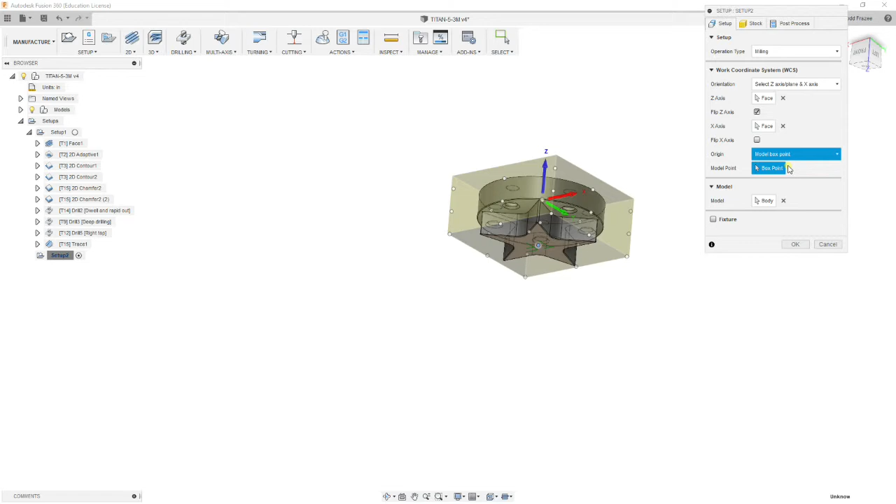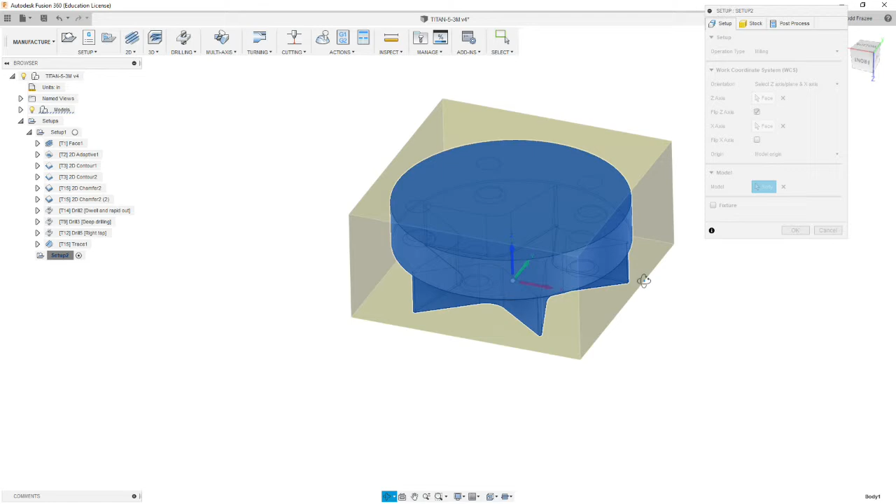And then we are going to select a model box point, which is going to be right here. Now if it doesn't let you select it, it's because that's where the origin was when the part was modeled. So you're just going to toggle this and go to model origin. So that puts our origin on the bottom of the part right in the center. We're going to indicate off the center of the soft jaw and the bottom floor of the soft jaw for our reference, because we don't have anything else to reference the Z height like we do with parallels. And we're going to select OK.

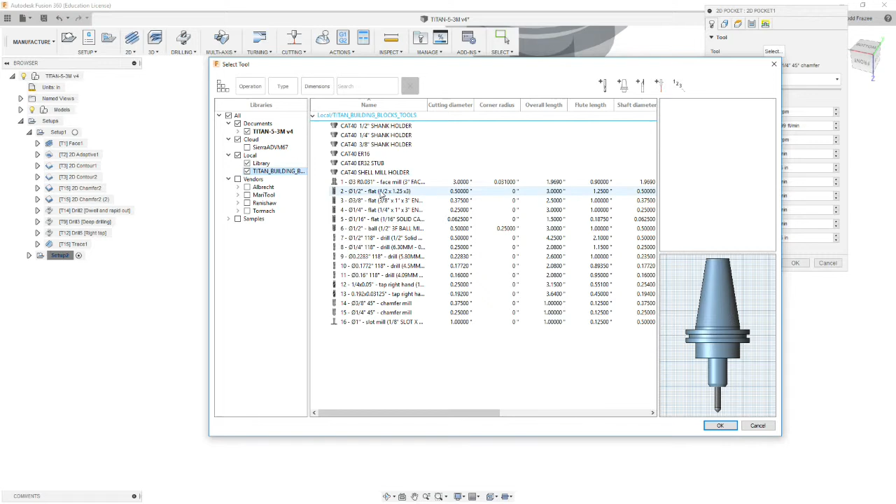Now we're going to go to 2D and do a 2D pocket, and we're going to select our half-inch end mill. So you're going to go to the Titan library, get the half-inch flat, 4,000 RPM. We're going to go 25, 25, 25, 13, 13. Then we're going to go to geometry and select this as our pocket. We're going to flip the arrow to the inside. We're going to go to heights: stock top is fine, top height is fine, and our selected contour is going to be the bottom. So all of these stay at default.

We go on to passes. 4 thousandths tolerance is fine. Climb cut's fine. We're going to go down to maximum step over. It's going to be 0.4, not 0.04. And we'll keep the deviation alone. This really doesn't matter because of the side pockets. Multiple depths, 0.125 step downs, one finish pass. We're going to leave 0.02 for that finish pass. Wall taper angle 0. We're going to use even step downs, and we're going to leave those other two at default.

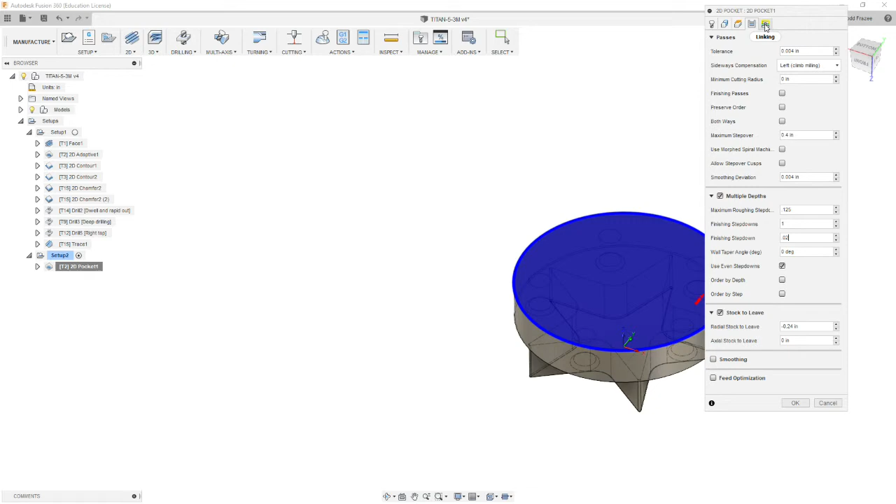Our stock to leave is going to be 0 on axial, but we're going to go negative 0.24 on the diameter so that we can overcut the shape with the end mill. Make sure we cut all the full clearance. Alright, so we're going to go on to the next tab, which is linking. Leave all these at default. We're going to do lead-in entry, 0.1. A 90-degree sweep angle's fine. We're going to do 0.1 on our linear.

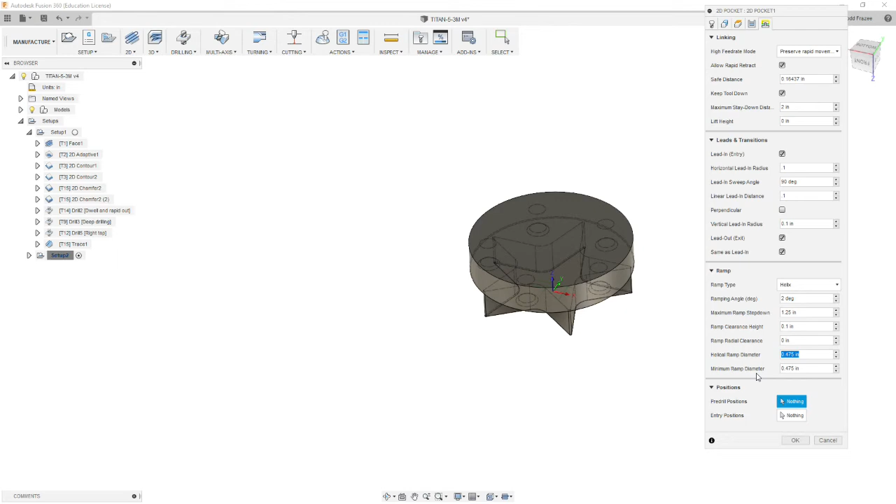We're going to have lead in and lead out the same. Our ramp type is going to be helix. We'll leave that at default. Ramp height's fine. Ramp radial clearance, we're not going to worry about that. And we'll leave those alone. That's fine. 0.475. And we'll hit OK.

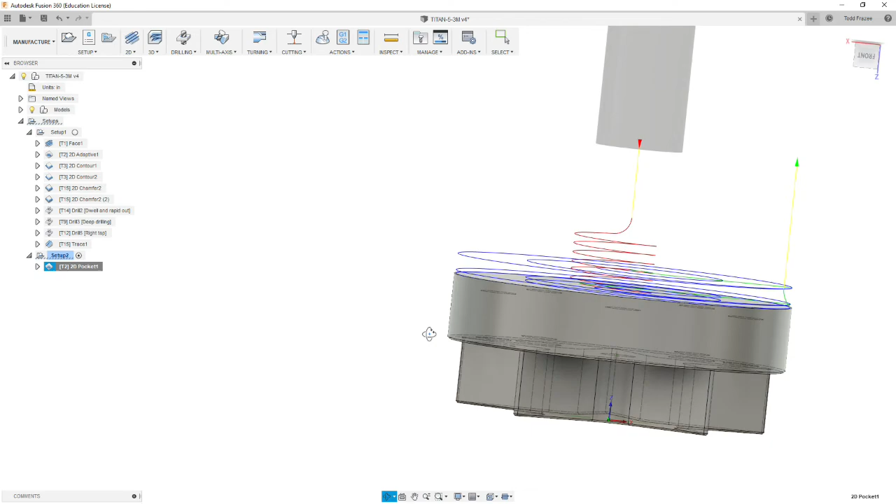Alright, so we've got a pretty good spiral in shape and spiraling out. And the center of our cutter should come to about here. So the 3/8 that cut from the other side should have no problem breaking through there at the end. Alright, and that concludes the tutorial for Titan-5-3M.